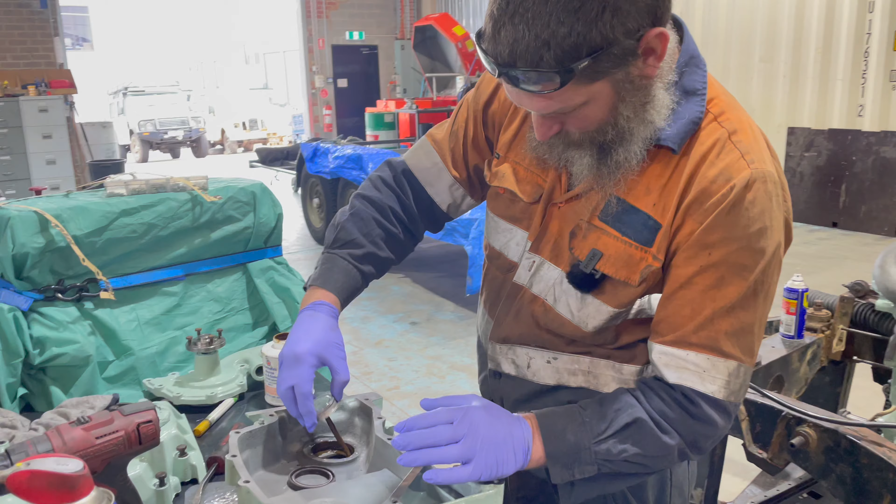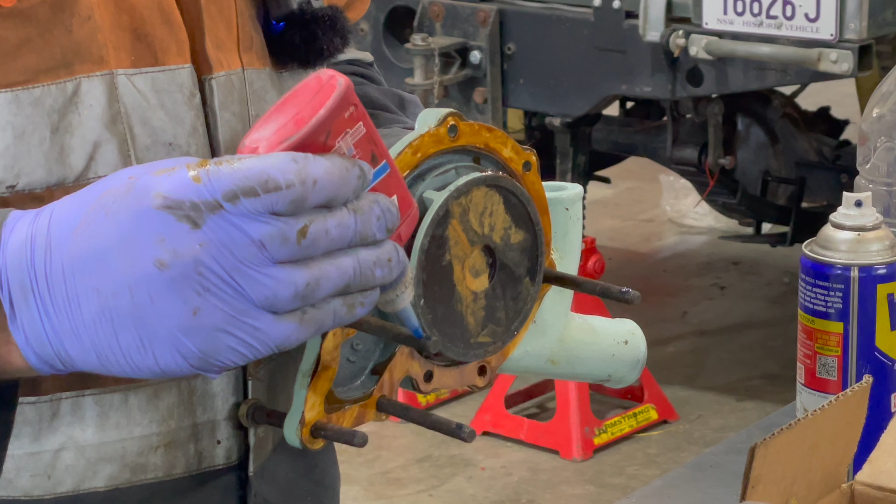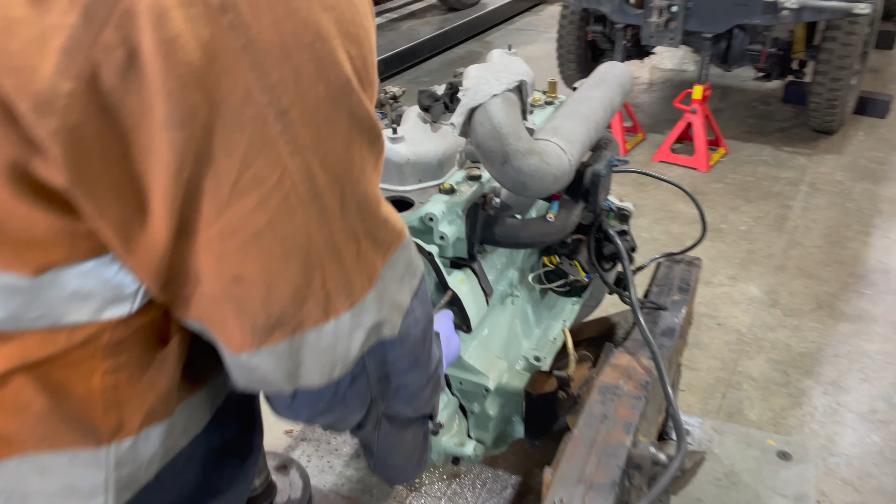More than enough. Oh, it's fallen over. Fortunately, the top's empty. Okay, so over here what I've got is a guide stud that I threw in just for the assembly to hold the gasket in place. Pull it out carefully, watching for that gasket there, and then offer up.

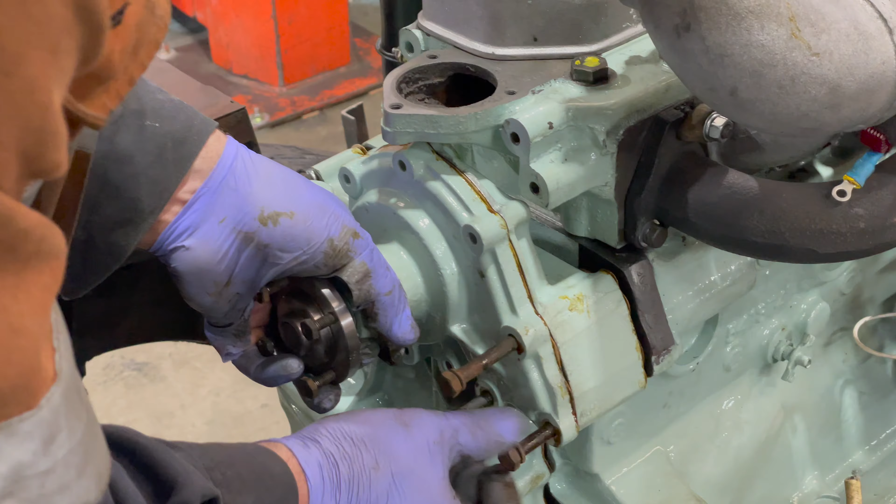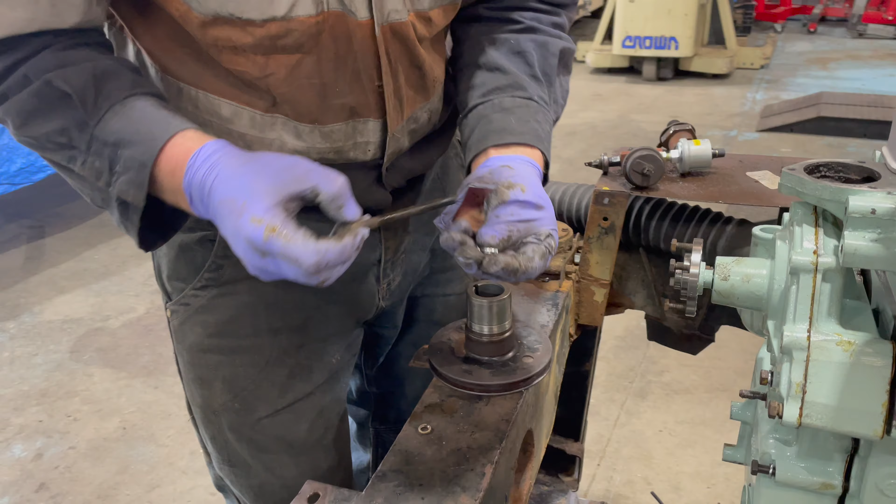Get them all started. Press the water pump home. Just slide them carefully, thread them through. And once I've got the first two bolts through, it's just a case of putting new washers on. There's that one.

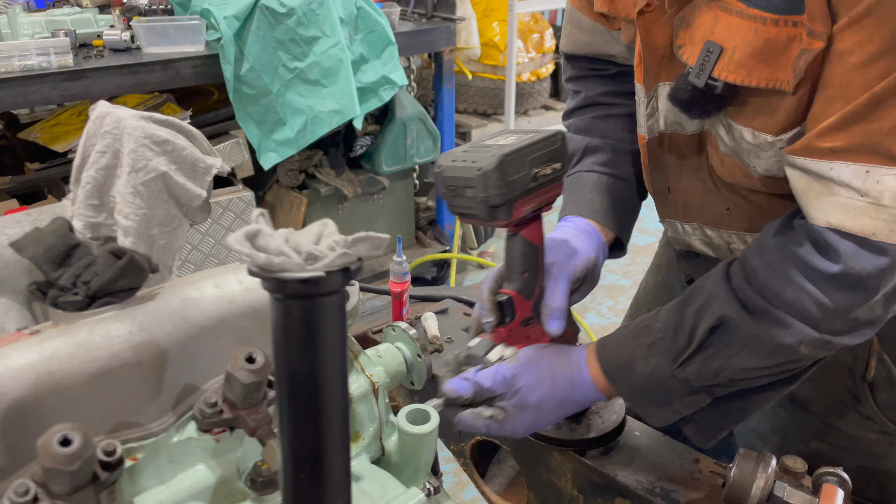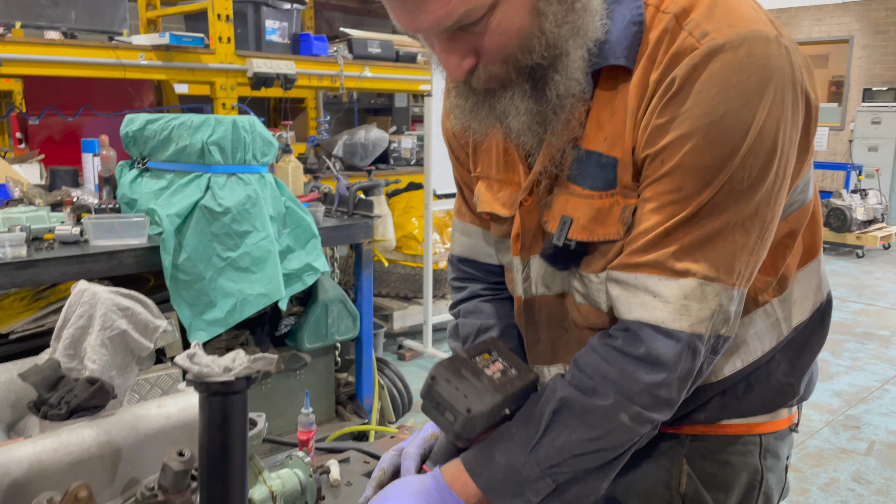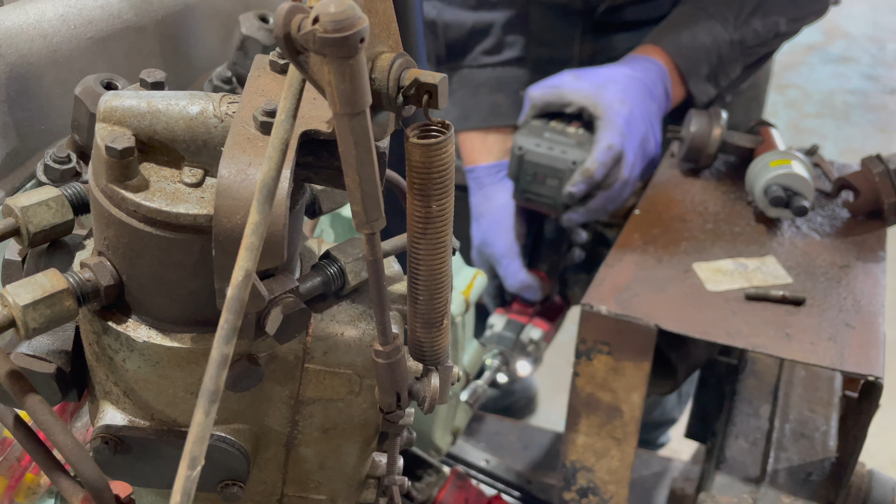A lot of the time you get told don't use power tools to do bolts up. Fair enough - take it easy, go gently, and use the weakest stuff you can find, and generally you can get away with it, me personally. So an Ozito rattle gun or impact driver that I bought years ago, I just use it for lightly spinning them in. Once I've got them all spun home, just enough to start closing up the split washers, I'll go grab a proper driver and do it up to the correct tension.

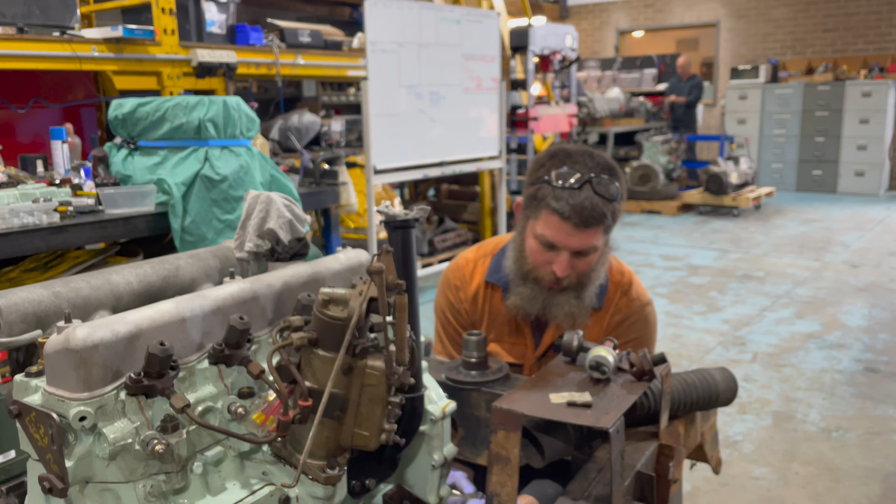You still leave plenty of tightening to do after that? Yeah, there's always plenty to go, because you've got to take up the little bit of space that the goop takes up. If you look now, you can see where the split washers have compressed right down to flat. So as long as you don't overdo it when you're going in with the rattle gun or impact driver, you save yourself a fair bit of time. And as long as you get some movement on the nut or bolt, you haven't over-torqued it - you know you haven't got 40 Newton metres, about 30 foot-pounds, sitting on a bolt that's only meant to have 18, 20.

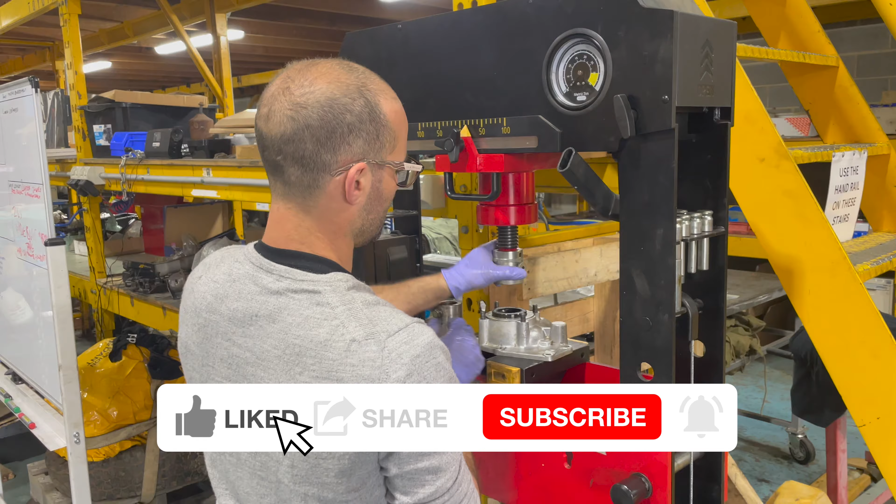In part 1, Dave mentioned the in-house laser cutting machine operated by business owner Marcel's brother Felix. Before we go on, let's go check it out.

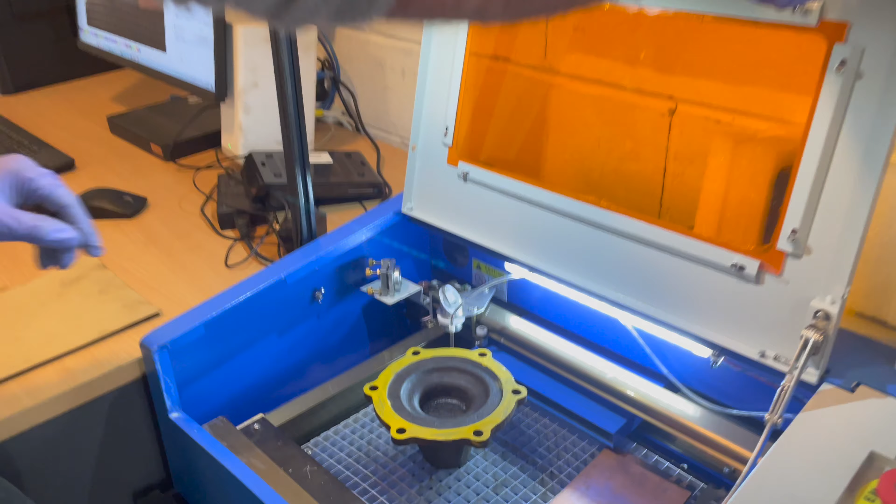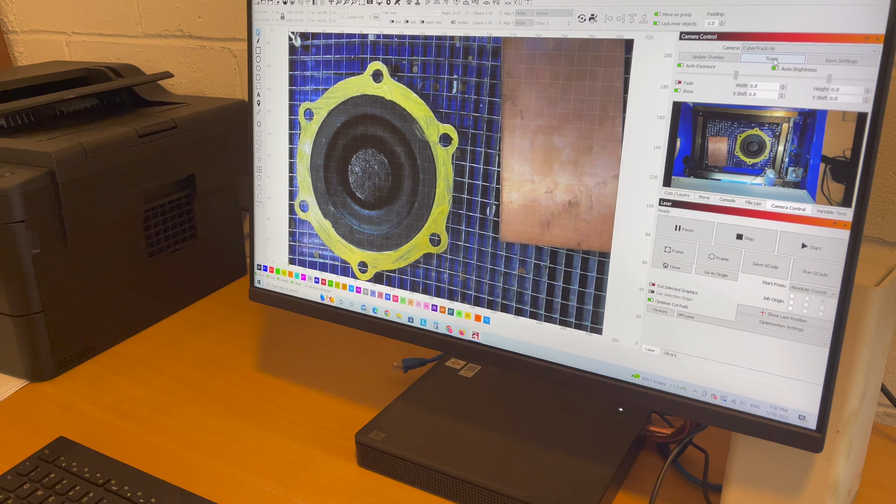Okay, what do we got? So I can bring that in here - this is our little laser cutter - and I can place that there, and with that open I can come straight over to the computer and generate an overlay of the part, and trace that part automatically. It takes a little bit of fiddling to do it perfectly, but generally it takes 30 seconds or so, and I end up with something that looks exactly like this.

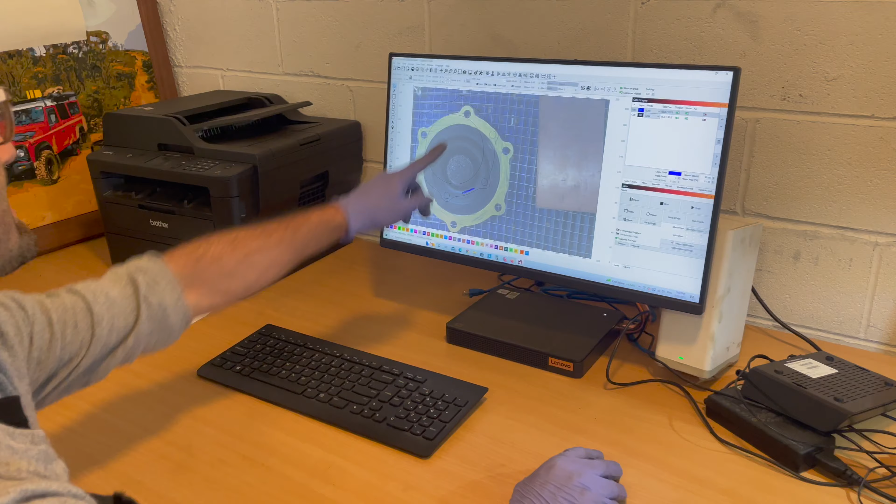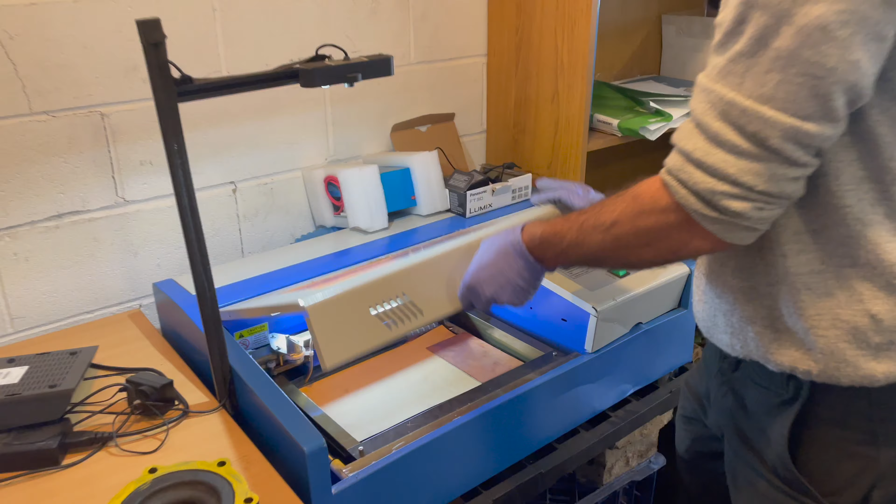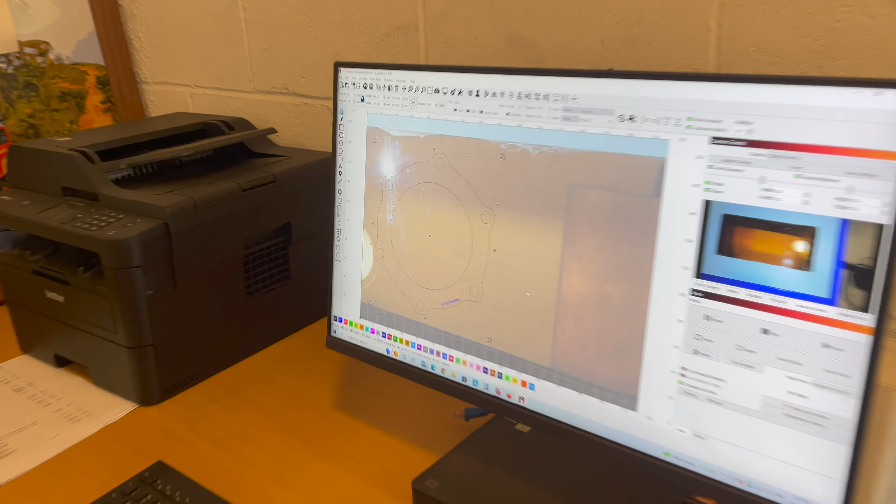Okay, great. Which is the part we want, and that's dimensioned correctly and everything. Then it's as simple as pulling out the part, placing in our gasket paper, and then I can update the view to see exactly where I'll be placing the cut. So I can move that so it's going to sit nicely there onto the paper, and if I home this, it should be homing, and the laser cutter in a moment should start.

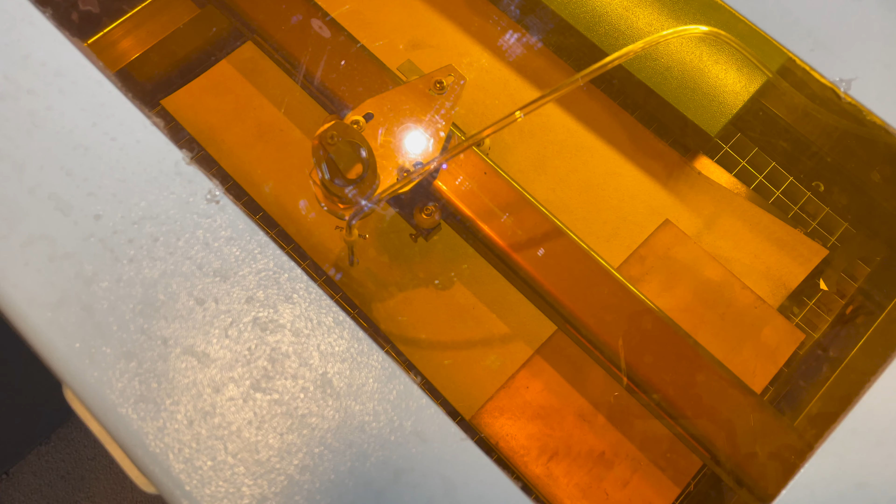And so this gives us a labelled, perfectly cut gasket that now we can make for ourselves anytime we want it. That's amazing. Oh, wow, crikey.

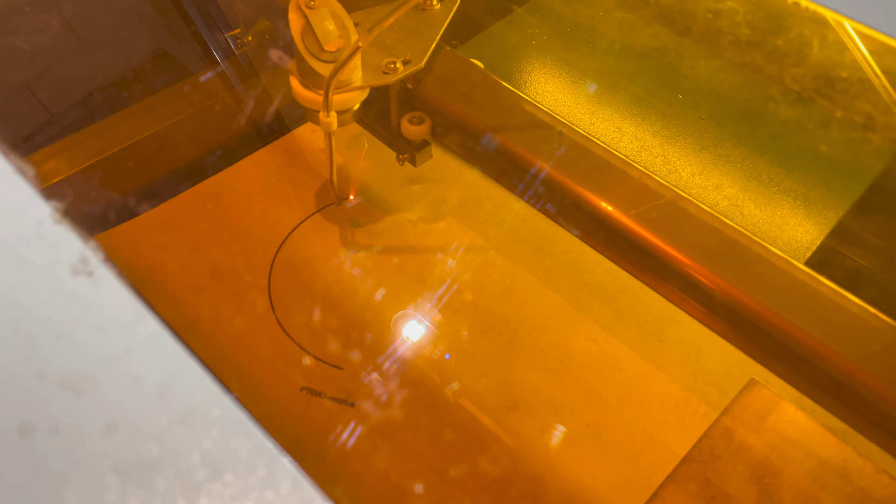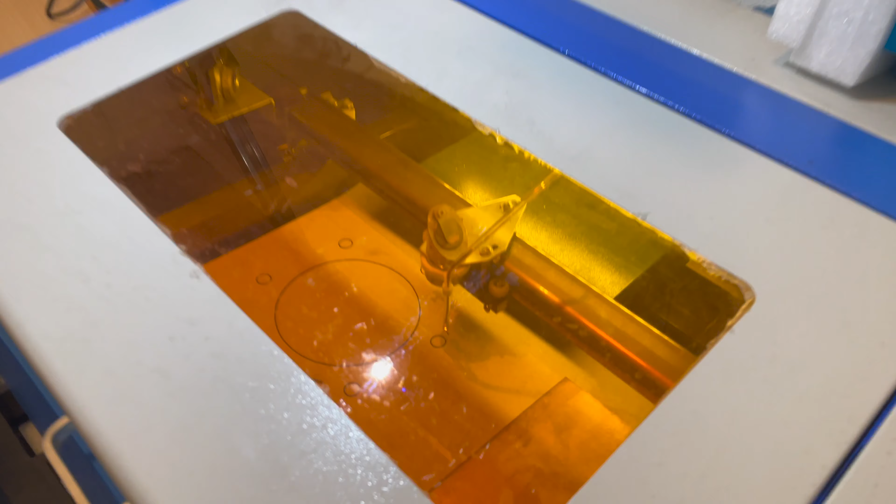Is there preference to use a piece from the manufacturer, or are you happy with this? It'll depend on the manufacturer. Some manufacturers make really high quality gaskets and they're readily available. Sometimes you can only get a low quality gasket even from a reputable supplier, or the materials are poor quality, or the thickness isn't ideal for the space. You can end up with gaskets needing to take up preload, or you might have been using shims but want to adjust for new bearings with a different setup - you'll change to a different thickness gasket paper, and we can do that in a straightforward way. But we can also make a completely customised part if someone wants something modified to combine different gearboxes or parts that wouldn't otherwise seal well. We can completely customise that in a very easy way.

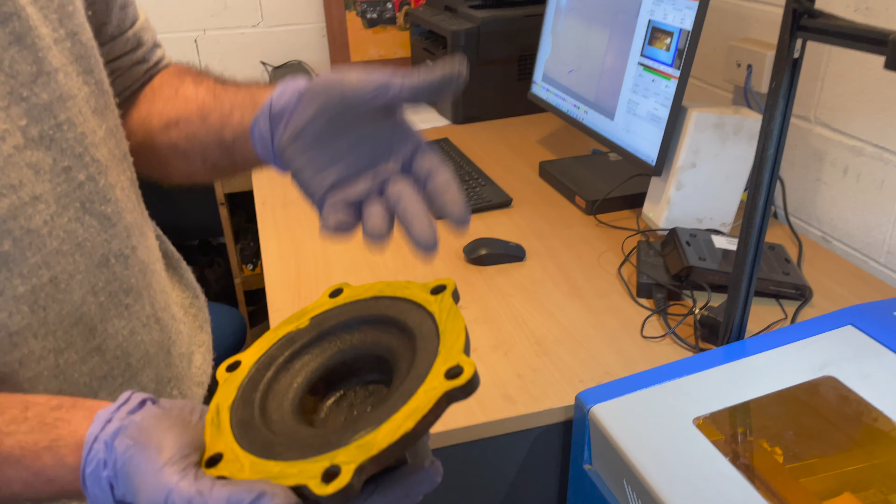And using the process of highlighting it, we're actually imaging the mating surfaces, and it's scale referenced with the camera. So yeah, it's not a new way to use a laser cutter, but it's a very straightforward way for us to get good gaskets. Done already?

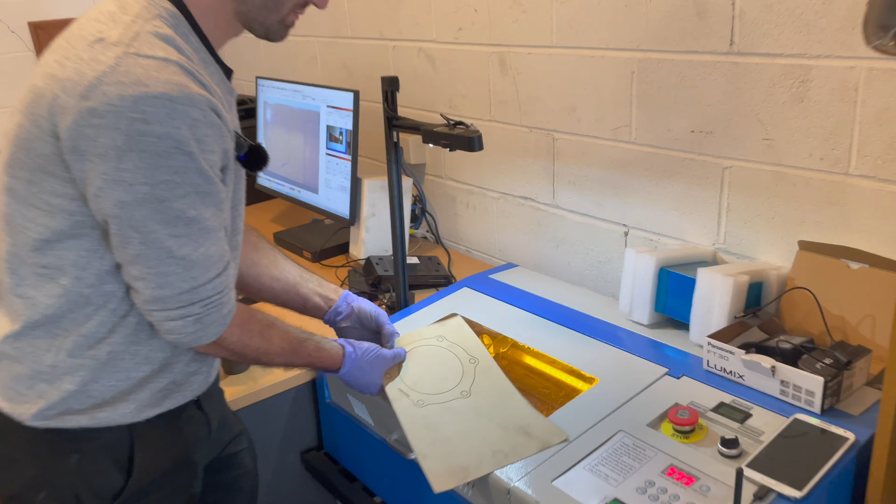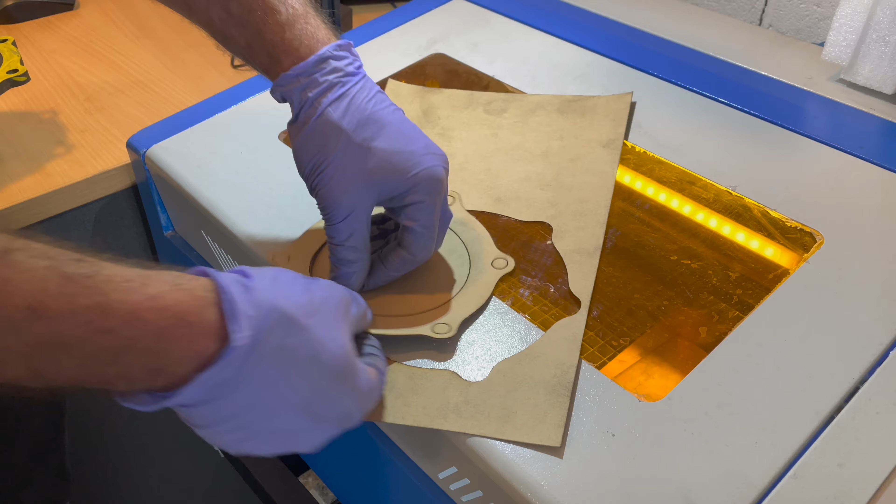Wow. Yeah, so that now - that's our gasket. It's tabbed together a bit so it doesn't flex if they're complex. Cool. Okay, so with that, like that, it drops on and is an absolutely perfect fit, and that is often a better fit than what we'll get from a reputable manufacturer.

We can make adjustments for things as well to suit setups that we may do slightly differently to get better fits or better tolerances, or to make allowances for aftermarket parts where you can't get original parts and the tolerances are slightly different in other areas in a stack up.

Is that a common thing now, becoming more common on Land Rovers? It's extremely difficult to get, unless you have access to new old stock parts that are dwindling. It's very hard to get parts that are actually in spec all the time, so often we'll be looking at parts that aren't British manufactured. The best really at the moment are Italian manufactured parts, but they don't make everything, and the stuff they don't make are often knockoff parts that are poorly cast, poorly manufactured, and a good proportion of those actually have to be discarded or remachined.

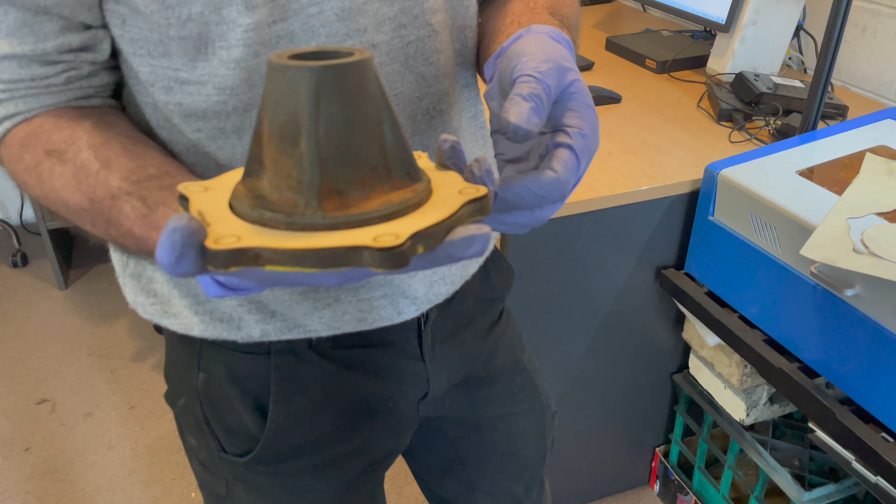So what have you just found? We've got a possible differentiation on the engine here. These bolts, which are from that block, and this water pump belongs to that block, but because we have the damaged timing case, what we've done is replace the timing case, and there may be a difference in the threads from the water pump to the timing case.

You guys get a little bit annoyed about that, but this being British, there's a number of different threads here for doing different jobs. They've got different size heads on the bolts. So your British standard fine, British standard Whitworth, versus metric, and versus Imperial are your more common ones.

But things like, these aren't the original glow plugs, but the original glow plugs, that thread there is a BSE thread, which is British standard electrical. And then you've got other things like the fittings over here on the plug on this side of the engine, which is where you would normally put your heater plug in. That's got a BSP thread on it. If you follow through what the actual thread is trying to do, it makes sense for it to be the standard that the British had for doing that job everywhere else.

Were you saying you could find different threads? Yeah, working on this, I wouldn't be surprised to find metric, Imperial, British standard Whitworth, and then British standard electrical, British standard pipe on one sub-assembly. And they've all got vagaries to the threads and how well the nuts and bolts go together.

Crazy. Yeah, par for the course. Well, that's just Land Rover, yeah? Or British, anything British. Anything old and British.

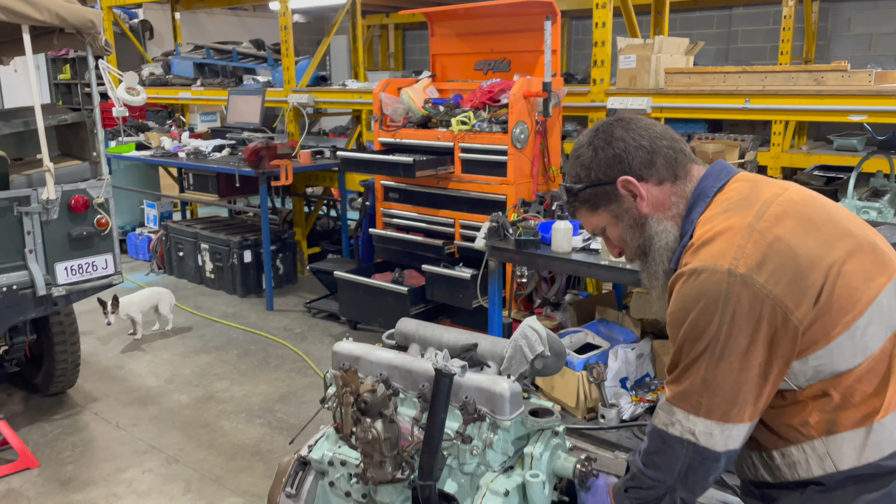So it wasn't a missed thread, it was just an alignment issue on the pump. In this case. Which is going to save me much swearing and cursing, because then I'm not going to lose a gasket.

And that's it. Clean it down, it's ready for the next bit. So the process for doing the timing seal, which is the one we were doing earlier on that engine, up here on the manual, this is the last edition of the Series 3 workshop manual.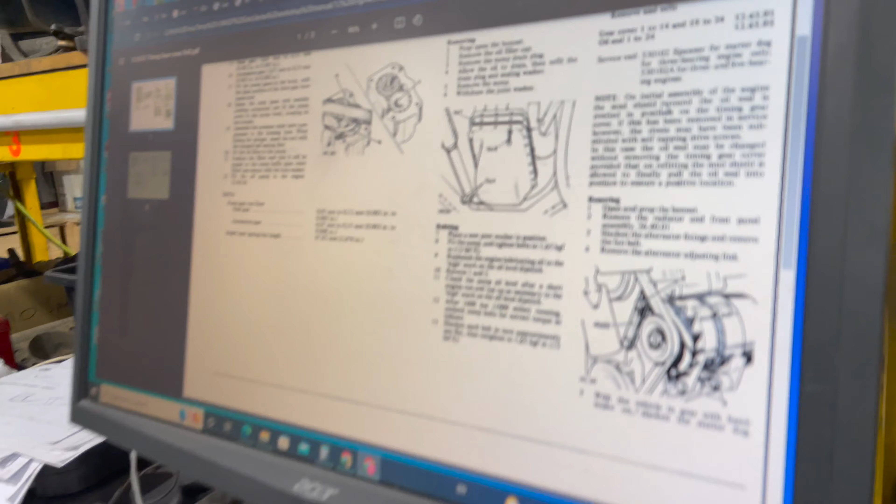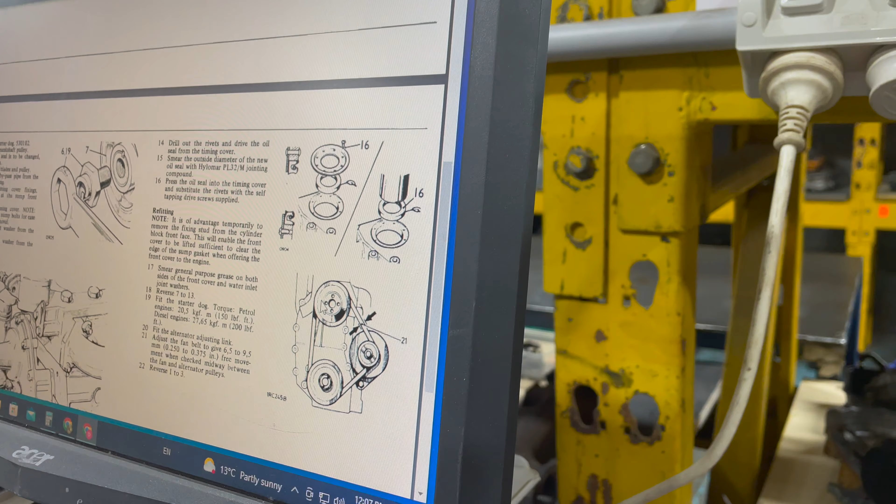It includes the note that tells us about doing the self-tapping drive screws to hold it in. And if we've got the self-tapping drive screws to hold it in, when we do the timing cover and oil seal, we don't have to follow a 2-page document. It's undo a handful of screws, take it out. And you can see they show you there the way that everything's meant to go, and one of the nice inclusions, they give you a nice breakdown of the orientation of the seal and how it should all go together.

So not all bad, the British engineering stuff. Well, you know, they fixed it the second time around. Torque to 150 foot-pound. Diesels, 200 foot-pound.

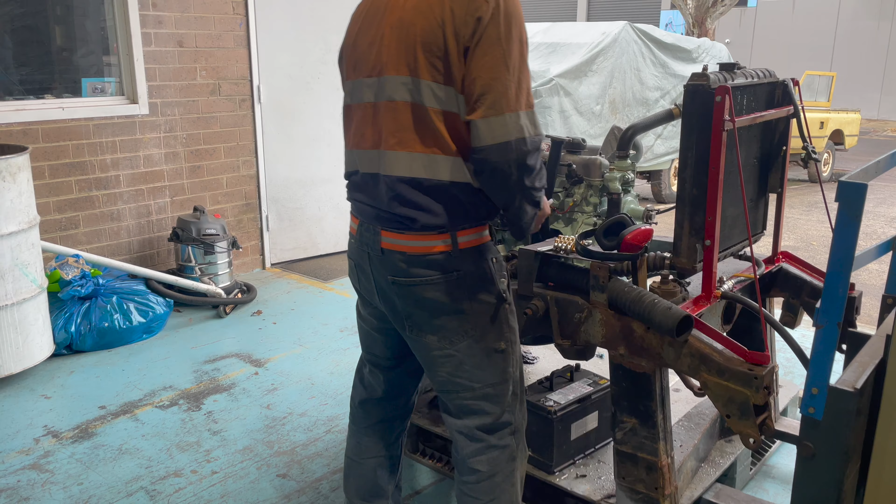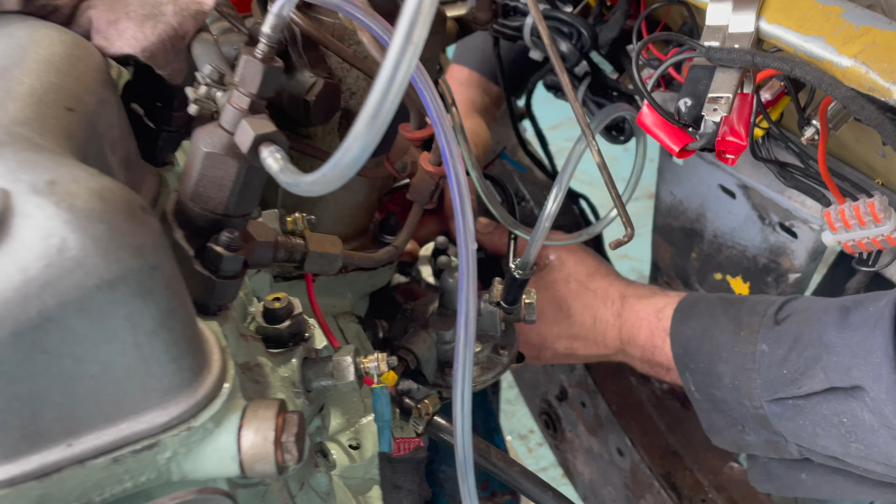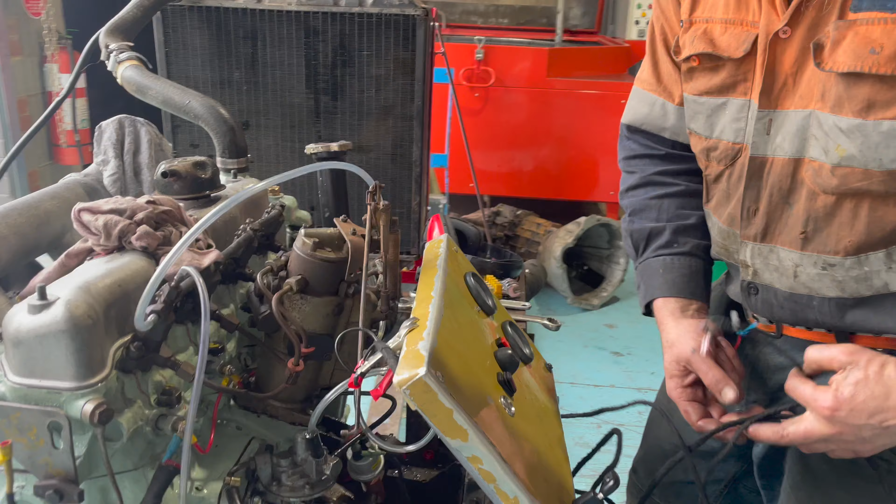Panel so that we can have a run up with some degree of protection. Because I'm only going for an initial run, I'm going to run for maybe 7 or 8 seconds. It's just enough to prove the injector pump. I'm not going to run it for long enough to need the temperature sender, so I'm not going to throw the temperature sender in on the engine, and she'll be good to go.

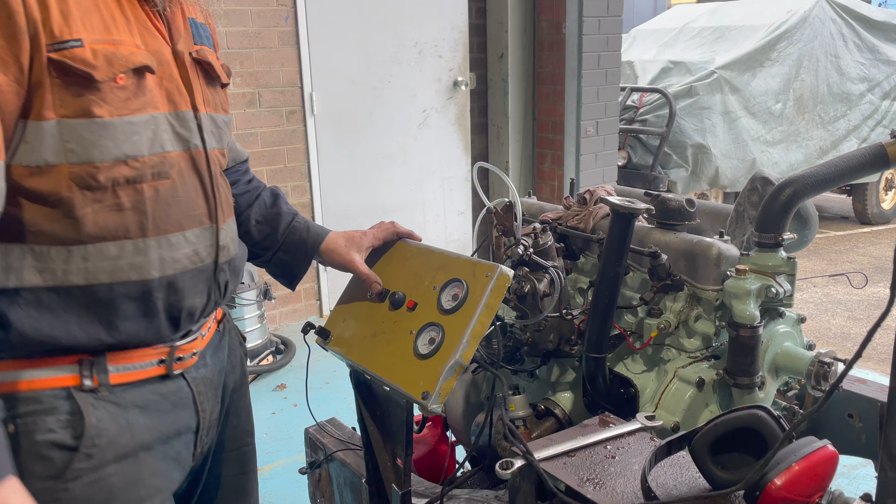Time of reckoning, eh? Well, you know, see how bad this can possibly be. No, I might like to start straight up.

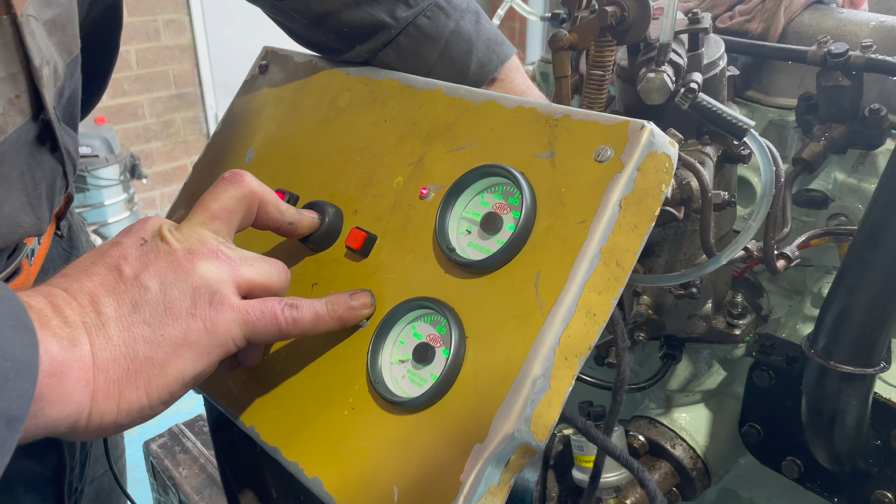Okay, so all I've done there is I've rolled it over. While it's been rolling over, I've had the injector pump open wide to try and bleed the injector lines. I've just been watching the oil pressure gauge and waiting for the oil pressure to come up so that I know that I've got a primed up oil system and it's ready for an actual crack at bleeding up.

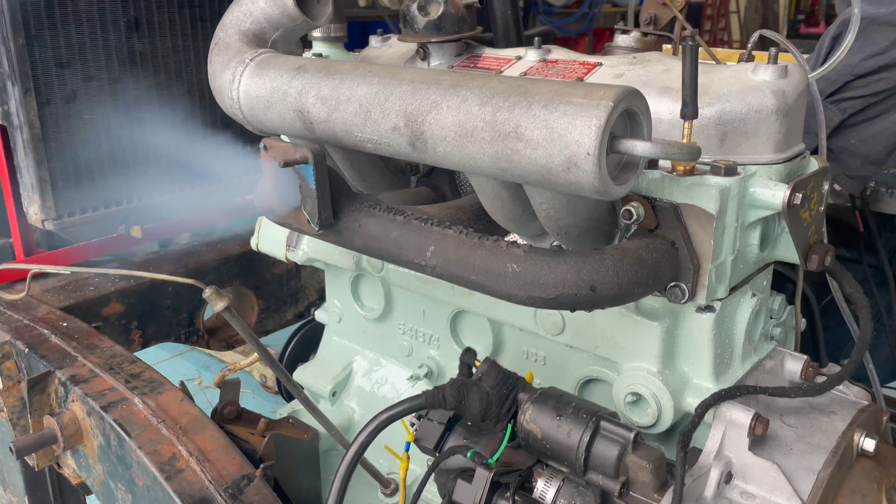She lives. They call that the money shot. Cool. Another one lives on.